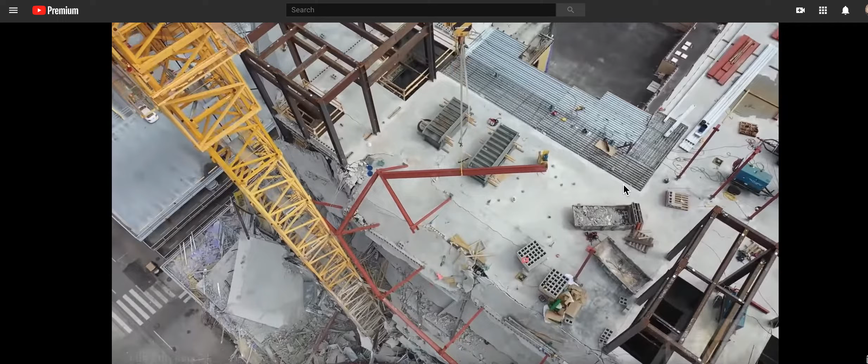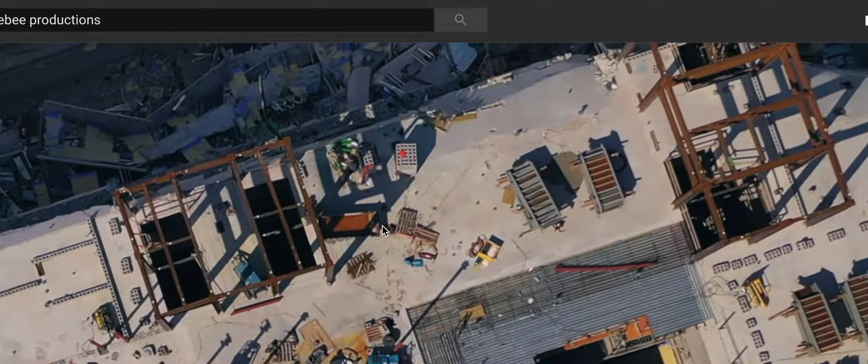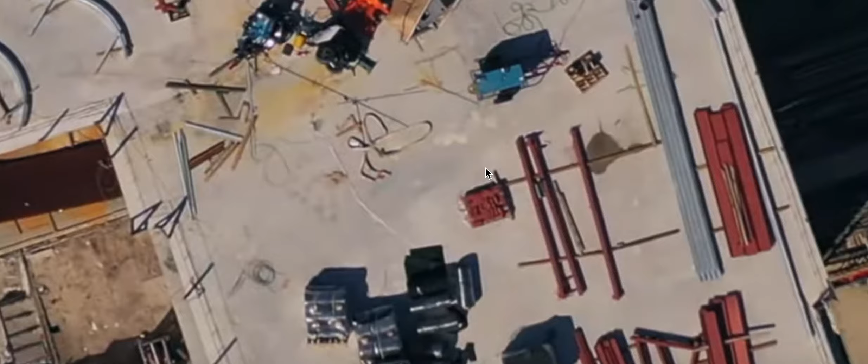As this falls down, this is what's going to cause all this strife across here. So right about there is our impact. I use triangulation here. I can come across the corner, come down and try to figure this out. Go to Bumblebees, and we come across the corner, high corner, the length of it. I'd have to figure out the length of this total crane length, try to figure that's another whatever X amount of feet. But there's the angle right here.

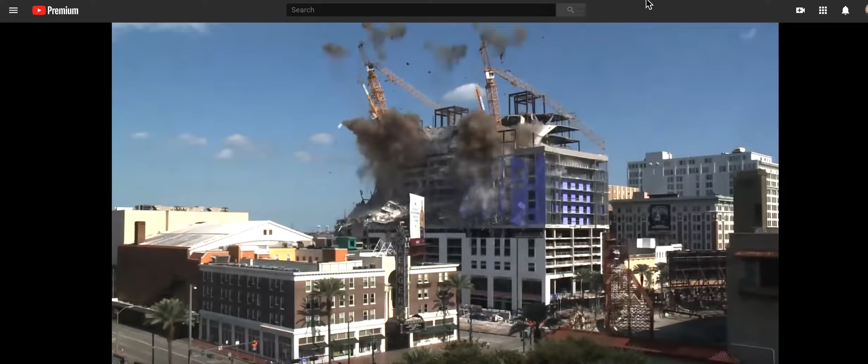Let's see if we can do this. We do have a debris field. I was trying to see if it impacted and broke the concrete decking here. I cannot find that took place. I don't see it - this decking, a diaphragm.

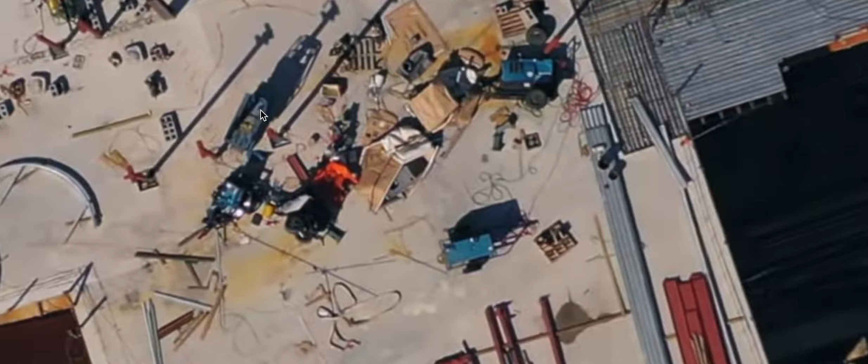Now it's almost a crime not to bring a crane up here and take this equipment off. It's still some great equipment. The equipment didn't do any harm. Why are they trashing this equipment? But this is the oddest thing here, right here. Got these multi pallets.

Let's watch this drag. Now watch it pull the bucket off. Nope, I don't see that. Right now it looks about parallel. And it hinged over at that point from here. Swing it, tearing it off, swing it over again like a baseball bat again. And there's a second swing.

This video shows the big concrete bucket. So this bucket came down now. This is going to pollute the whole idea of debris and everything else. This is where that path was. There are 1, 2, 3, 4 - well, that's 3 pallets, 4 and 5. So it's got concrete on it. Oh, it's got a piece of wood on it.

So we're trying to figure a path. There's a piece of wood. As you can see, that wood is still in place. That piece of wood right there, still in place.

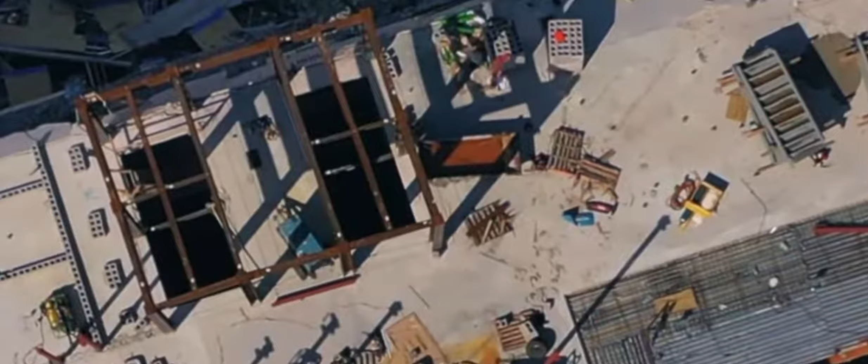It was able to - this path took out these columns. We're going to count the seated columns in a minute or not. And these columns took down - see the 1, 2, 3 columns, and here's a shadow of a column. Those columns did the deceleration of this. Let's confirm the location again.

These 2 columns did the deceleration of that crane because these columns loaded on top of - I don't know if it's a beam here or not. Look at the impact that thing was able to take. So these 2 did the deceleration. These 2 guys, was it 2 of them or 1? Was it these 2? I think it's these 2, right? Shadows on this one - these 2 took the forces.

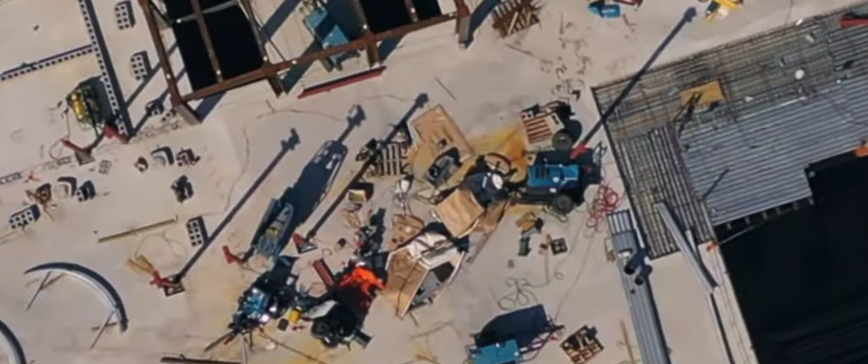Yeah, I guess it's red. There's a shadow, red, and there's a shadow, red. And then there's a gap. 1, 2, 3, 4, 5, 6. Those 2 did the deceleration of this. That's why we don't see the crazy impact. And there's the path it took.

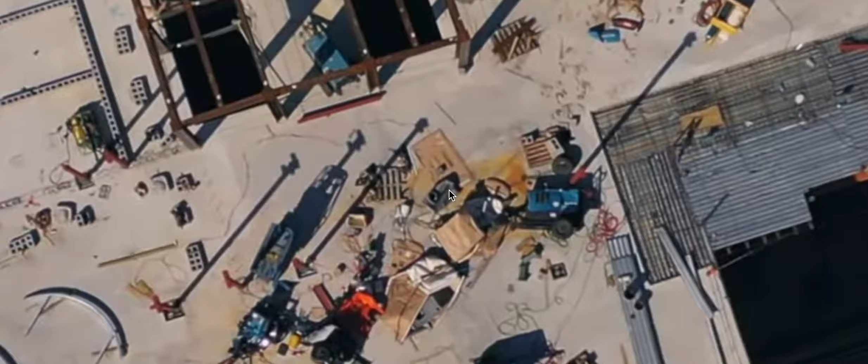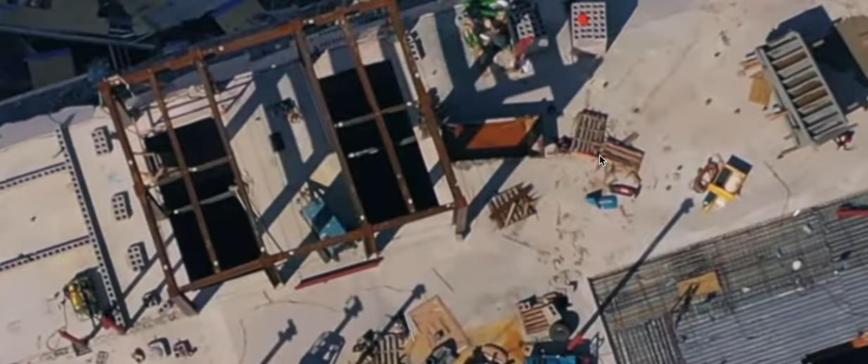I guess those red beams went off the building and became projectiles. It hit the back of that bucket. When it came off, it grabbed the front of the bucket, because there are the 2 pallets remaining, or maybe 3, not too sure. And that might be the path right there, the score mark. And then off in that direction it went.

I'm just sharing data with you. This is stuff - how I look at all this stuff and learn, and this is how I'm able to look at this debris field and start reverse engineering things by looking at things like this.

So that's the path. That explains why the deck was able to take that major impact initially, because this took the initial impact of the downward swing of the jib.

1 and 2, maybe they got entangled, or maybe they flung off like a broken nail, like you're driving a nail in there and it popped off and flew each direction. Who knows? You'd know if you find it down there or in another building somewhere.

It took that pallet out. That pallet went bye-bye. Yeah, that pallet and the cinder blocks also went bye-bye.

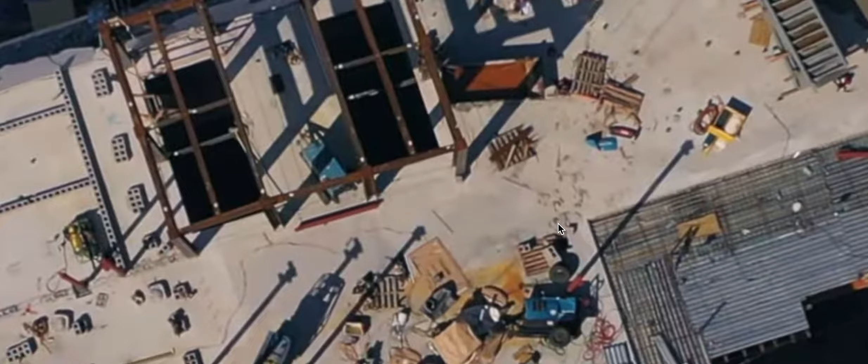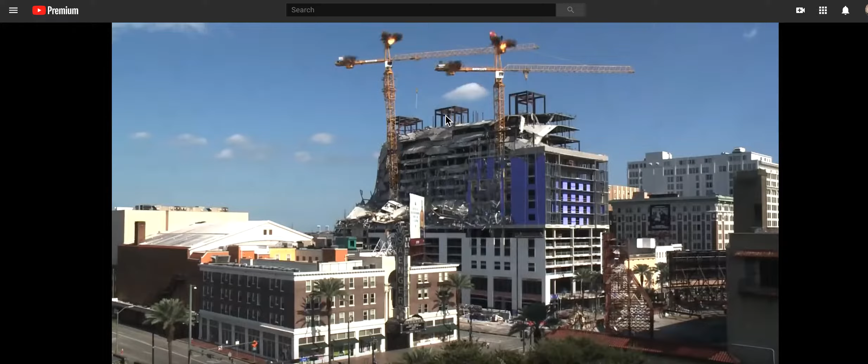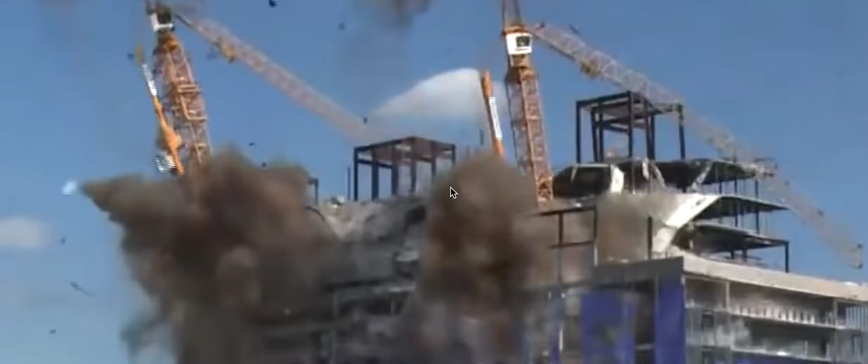So we don't even see it there, but right there is where it's probably hitting those red columns in the background. It would be these two, right there. I believe that's the impact of the 1 and 2.

That caused the deceleration of this guy. Now it's hung up or something, because we get this kink here at this point. Maybe it's still hung up on that, tearing those off. And maybe that's it there. I don't know.

I see debris falling. There's that projectile, swinging back around.

And this was supposed to be with the least impact, so we missed that thing go down. Maybe it slapped it so hard, maybe it slapped it off the backside of it. This is the concrete, this ton of concrete here, debris.

Well, the pallets are there, so 1, 2, 3, 4, 2 pallets that made it. So it didn't just, it did. I don't know how that. I don't know where that went. Maybe it went. No, it didn't go down there.

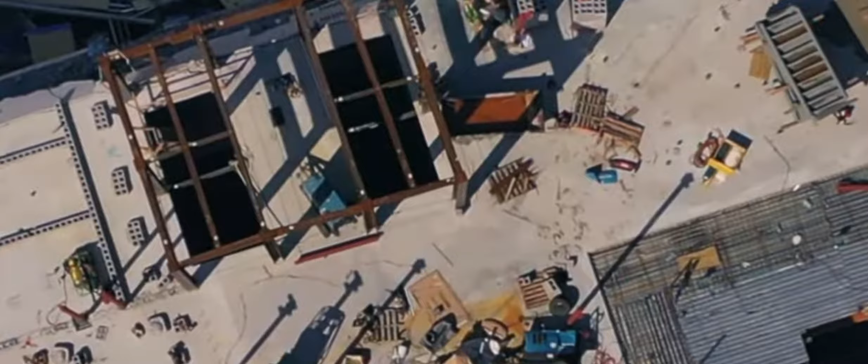Well, let's look at the configuration of this. These are not touched. There's a red rope there of some type, maybe the lanyard. The rope appears to be right there too. So that appears to be the path that we missed it being dragged off somehow, or projected.

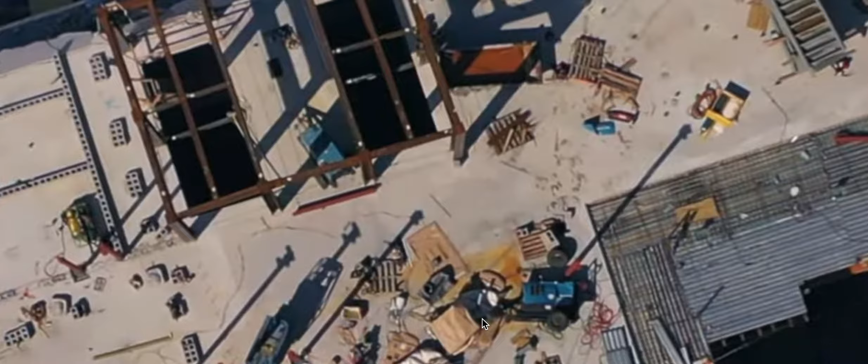Maybe when this hit, it popped it, and maybe that steel hit the back of it, giving enough force, like a baseball bat again, to drive it off.

I don't think it went across here. There's something in the path there. All this is in the path here. I think this is the path, and we just don't see it.

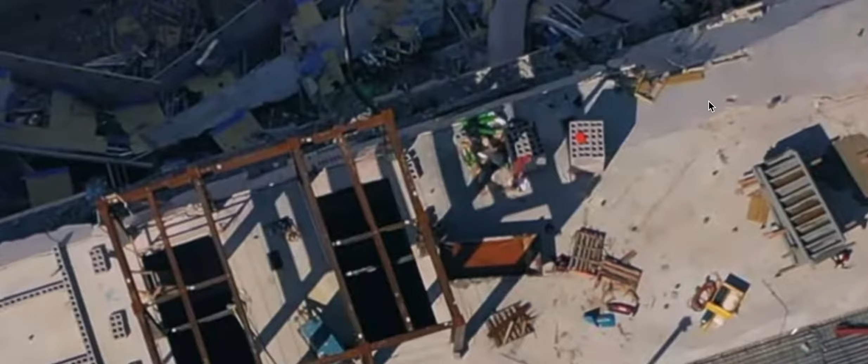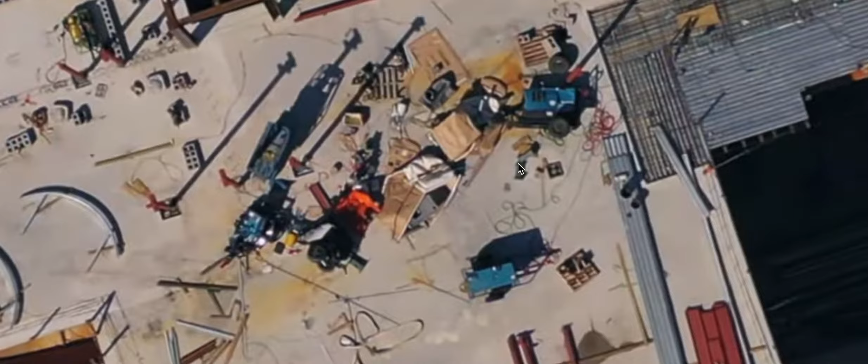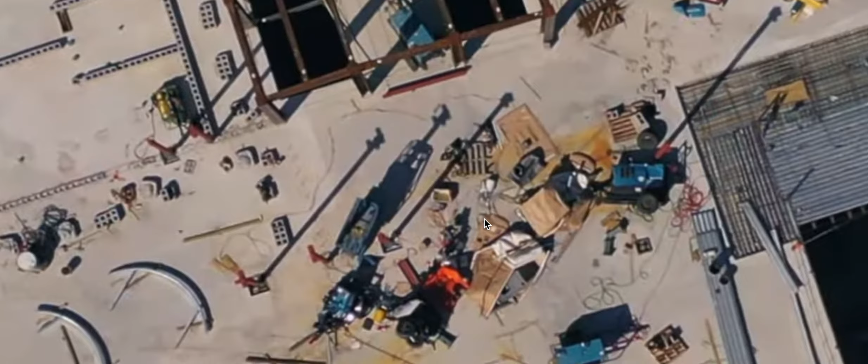I'd like to see that in another video, but now this explains the impact. It would be very interesting engineering-wise to look at the columns below this and the steel below it, and try to calculate what the forces were, or roughly call it dead weight impact from a certain distance, and see what happened there.

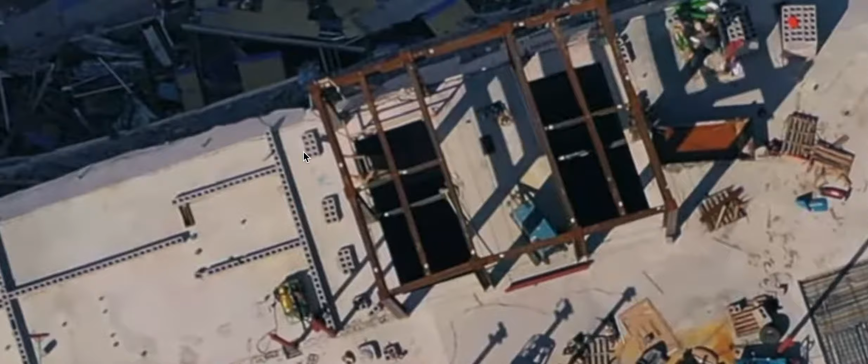The wall system, we talked about that. How much did they make it out there? I think right about here is where they were going to start building the storage area. I don't know, there's a stockpile of materials here.

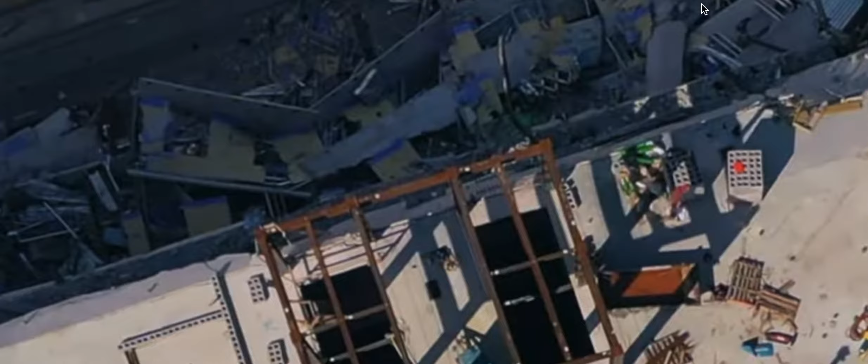Let's jump into what I was going to present to you today also. So I wanted to give you that for a little teaser, then we'll jump right into OSHA.

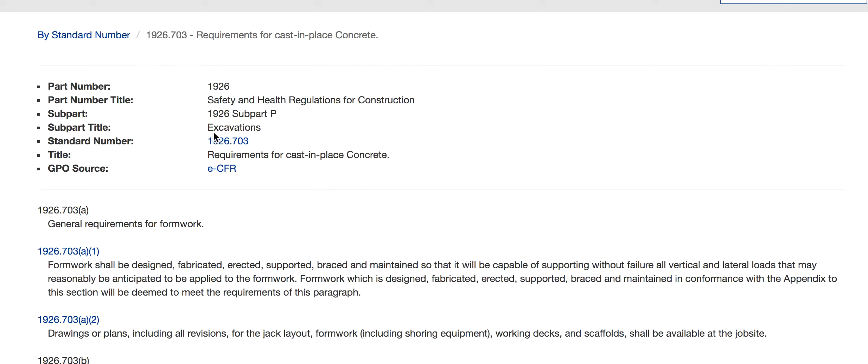I believe 703, so this is going to be addressing formwork, and what I'm going to show here is, well, let's let it read: general requirements for formwork. General requirements. Formwork shall be designed, fabricated, erected, supported, braced, and maintained so that

it will be capable of supporting without failure all vertical and lateral loads that may reasonably be anticipated to be applied to the formwork. You understand what it just said? Reasonably be anticipated - meaning it's subjective.

You believe that this is the forces, and so you're going to say, well, this is the formwork I'm using. Formwork which is designed, fabricated, erected, supported, braced, and maintained in conformance with the appendix to this section will be deemed to meet the requirements of this paragraph. So if you think it's reasonable and you're qualified, you can back up your reasoning, and it sounds reasonable.

Why that sounds reasonable - then you're good to go, because they're using reasonable, not any other strong format. It will be a bit of a strong format down here, but it will still come down to reasonable. Drawings or plans, including all revisions, for the jack layout, formwork including shoring equipment, working deck, scaffolding, shall be available at the job site. Well, where else would they be available, right?

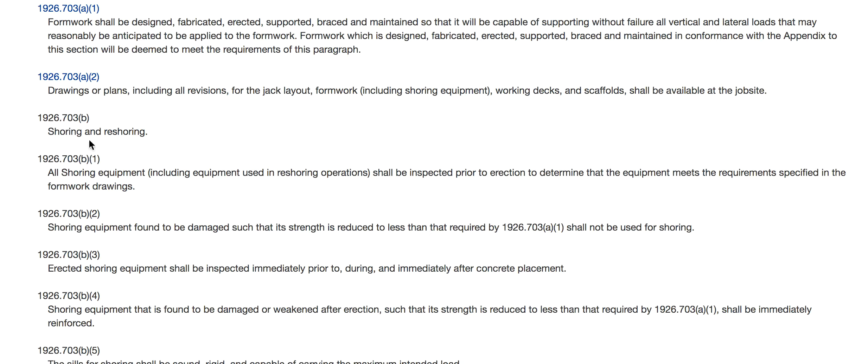Shoring and reshoring, meaning you've got to have it. Shoring and reshoring. This is what we talk about with this structure that we just saw exploding. Whatever, I've got FIU in my mind. It's Hard Rock Hotel. All shoring equipment, including equipment used in reshoring operations, shall be inspected prior to erection to determine that the equipment meets the requirements specified in the formwork drawings.

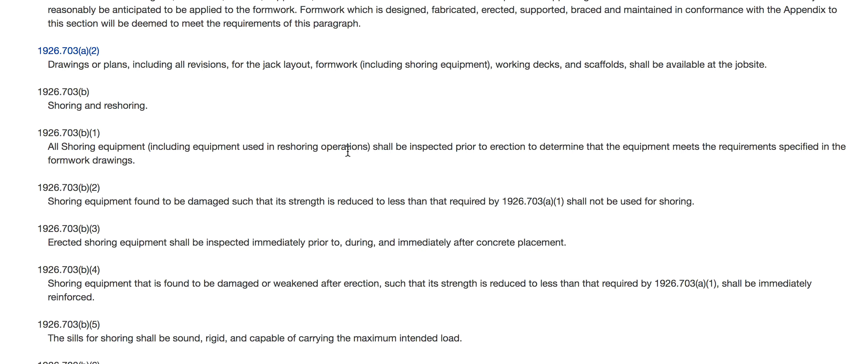So this is so vague. This means you can't say, I think it's okay. It says it shall. It shall. So you can't use your equipment as an excuse that I thought it was okay. It shall. It means it must. Shoring equipment found to be damaged, such that its strength is reduced to less than required, shall not be used for shoring. So you can see you can have damaged equipment. It just needs to meet the loads that you currently are going to apply to it.

Erected shoring equipment shall be inspected immediately prior to, during, and immediately after concrete placement. Look at the issue here. Erected shoring equipment, so that's all equipment, right? All the braces shall, meaning must, be inspected immediately prior to, before you start, and look at this part, during. This means you do get to send a worker down there, and this is what I stated, saying I wish they'd make it so no one can work on the floor below. But OSHA states you must send somebody down there to check the shoring, and immediately after concrete placing.

But the person you send must be qualified, and this is what I put on my tag in that last video, saying if they do it, it should be a qualified person. That's what I was trying to allude to. But now, as one of the law classes I've taken for continuing ed stated, law enforcement classes, I'll give you that much, the instructor used to always say it's nice to be right, but it's better to have a cite. So what I told you was kind of the nice to be right type thing, but now I'm giving you the cite. That instructor was very serious about, you can say it, but now back it up.

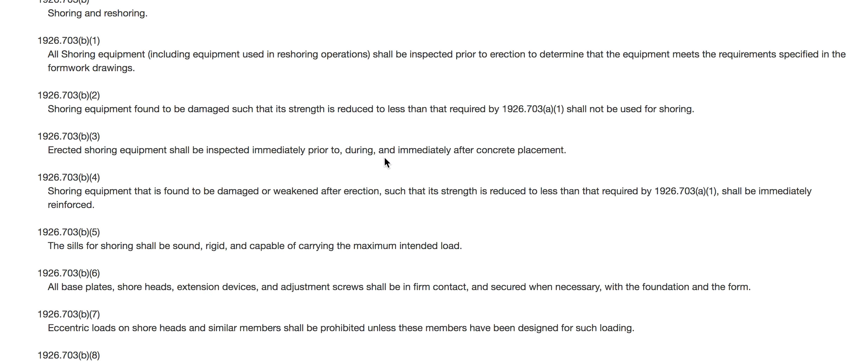So I would back it up under 1926.703(b)(3). Erected shoring equipment shall be inspected. So I'd back it up that I was allowed to send that man down there because he's qualified, say he was. I don't know. Because he's qualified. That's the qualification thing that's going to really matter in a moment. I tried to ask the cousin who wrote on the link there to ask the friend, was his friend qualified to do that? This would be the main issue here.

Shoring, under the next section, found to be damaged or weakened after erection, such that strength is reduced to less than required, shall be immediately reinforced. So they're stating it must be immediately reinforced. I think shall is wrong here. I think OSHA is putting people in danger. You'd rather walk away from that shoring than attempt to shore up something that's collapsing underneath you, actively moving. You'd rather call it a day, unless you know how to brace it, working your way up to it, not just jumping right to the middle of it, attempting to push it. You'd have to actually have training in how to reinforce that specific load, and that training would not be typical.

I would argue that you'd have to first figure out that this was the part that was collapsing. You've got to surround it, secure the area around so you can limit the collapse back to this new shear plane, as I like to call them, and then close that shear plane in. But imagine most people would just say, oh, it's buckling there or falling down there, I'm going to put a load right there. That's going to be pushing that load all around. It's not going to work. So I argue that this is actually an unsafe act by OSHA, stating you shall immediately reinforce.

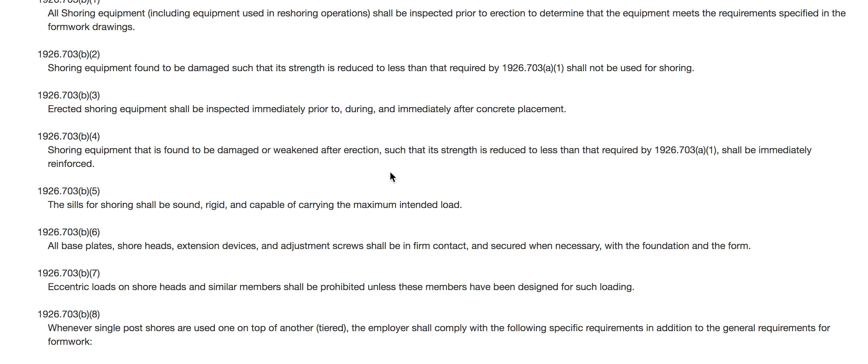This is ridiculous. Shoring equipment that is found to be damaged, and this part here is important, weakened after erection, such that the strength is reduced to less than required, shall. So after erection, it is weakened. How do you know? Now you say, well, he didn't say it was being poured.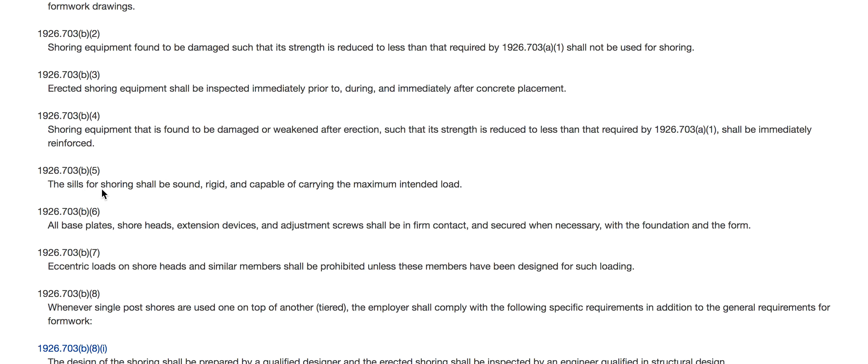Bear with me. The sills for shoring shall be sound, rigid, that's the base plates, and capable of carrying the maximum intended load. All right. All base plates, shore heads, blah, blah. Eccentric loads on shore heads.

This part here is interesting, because all codes are subject to interpretation, meaning you could play with the interpretation of what they meant by it. They don't give you a more direct explanation of exactly what they're talking about. It's subject to interpretation. Whenever single post shores are used one on top of another, tiered, the employer shall comply with the following specific requirements in addition to the general requirements for the formwork.

What's the definition of tiered? I would almost argue that if you put a 4x4 on top of a 4x4, you just created a tiered section. The design of the shoring shall be prepared by a qualified designer, and the erected shoring shall be inspected by an engineer qualified in structural design. This is the next subsection.

So this part right here, where they said you inspect it, that worker now gets eliminated as far as I'm concerned, because the design of the shoring must be prepared by a qualified designer, and the erected shoring, meaning the shoring that's already put in place, must, there's a shall there, be inspected by an engineer qualified in structural design. So your regular civil engineer guys don't really qualify, because they want somebody qualified in structural design.

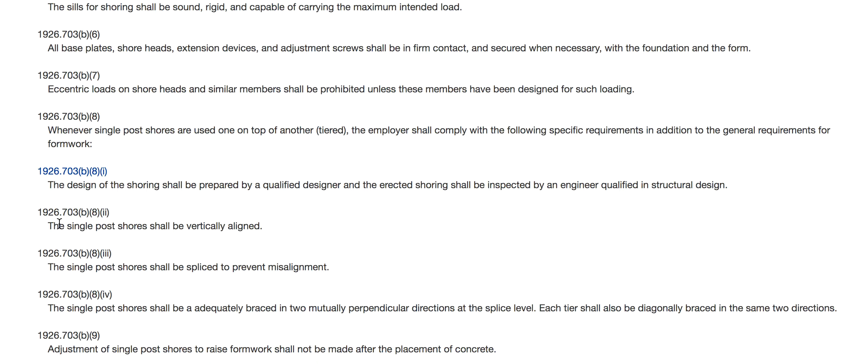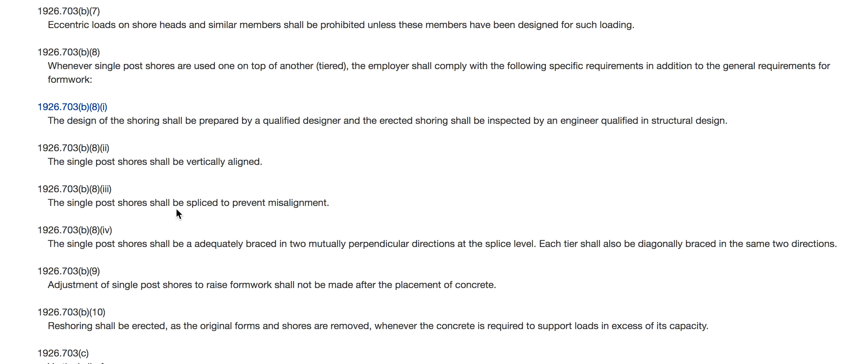The single post shores shall be vertically aligned. Vertically aligned. So what is acceptable as vertical? What's acceptable as plumb? The single post shores shall be spliced to prevent misalignment. Isn't that interesting? The single post shores shall be adequately braced in two mutually perpendicular directions at the splice level.

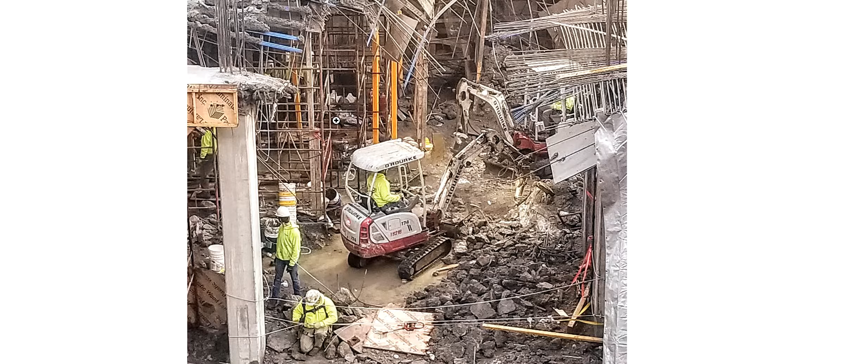So perpendicular. So when we see our man, is it right here? He sent me the images. These are scaffolding right here. This one's not perpendicularly braced, is it? Unless somehow they braced it back to here, and you consider the cross bracing on this scaffolding perpendicular, and then you'd have to go this way. But these are two. This is a splice system. Look, 1 and 2. I don't know if it goes down to the ground. It appears not to. That would be a lot of cutting.

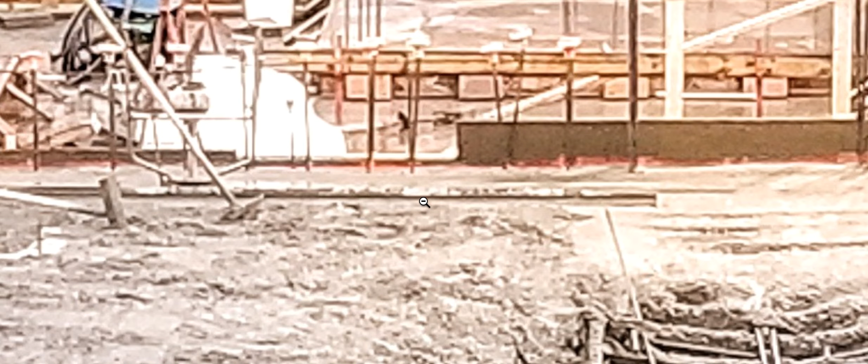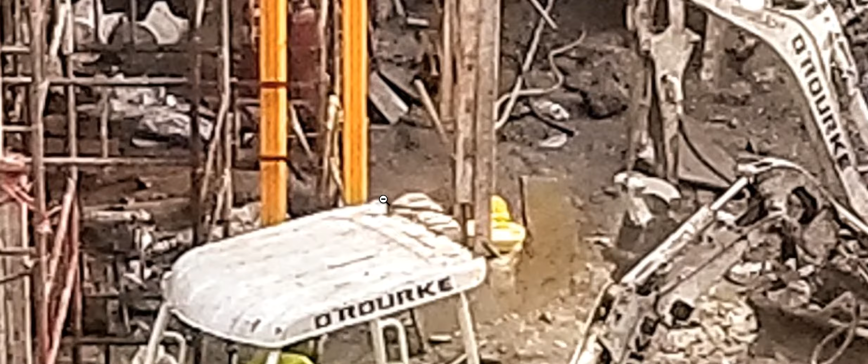Firemen moved a lot of stuff, as we saw, but in this other image, they used cross bracing. Remember video number 3 on this? I think it is. You have to go find it. I talk about how they used cross bracing and not perpendicular bracing. I don't see where OSHA allows for cross bracing. I see where they say perpendicular.

Oh, great. I lost it, right there.

Okay, here we go. Each tier shall be diagonally braced in the same 2 directions. Now we say diagonally. So first they say 2 mutually perpendicular directions at the splice level, and then we go here. Each tier shall be diagonally braced in the same 2 directions. So they want times 2. I mean, this is what I'm looking at. They want diagonal and cross bracing, parallel, perpendicular directions of the splice. I don't see that there. So just pointing that out.

Adjustments of single shores to raise formwork shall be made after the placement of concrete. Now, did you just see what the concrete weighs so much? This is the most stupidest thing I've seen so far. Adjustment of single shores. So there's single post shores. To raise formwork shall be made after the placement of concrete. Oh, I'm sorry. Shall not be made after the placement of concrete. So you can't raise it anyway. It's a single post. It's only one size. How are you going to raise a single post shore? Unless they're talking about the splice kind where you can crank it up like a threaded screw kind.

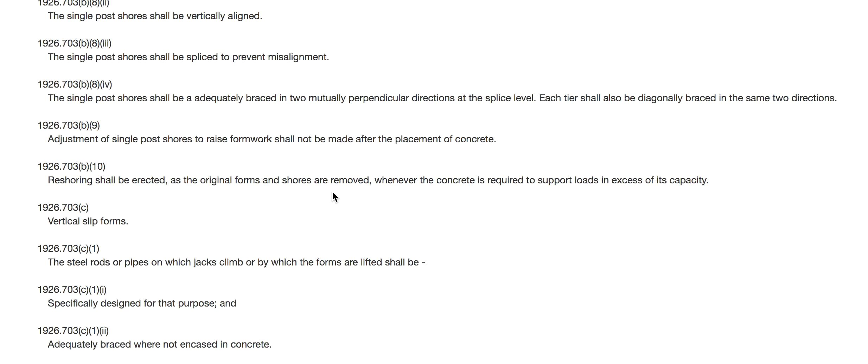So shall again. As the original forms and shores are removed. So as you remove one, you're putting back the reshores. Whenever the concrete is required to support loads in excess of its capacity. All right, so this means that the concrete hasn't matured yet. This is what this means. Not that you're going to keep them in there forever. And we'll get to that. Vertical slip forms. Let me see if I can find that real quickly.

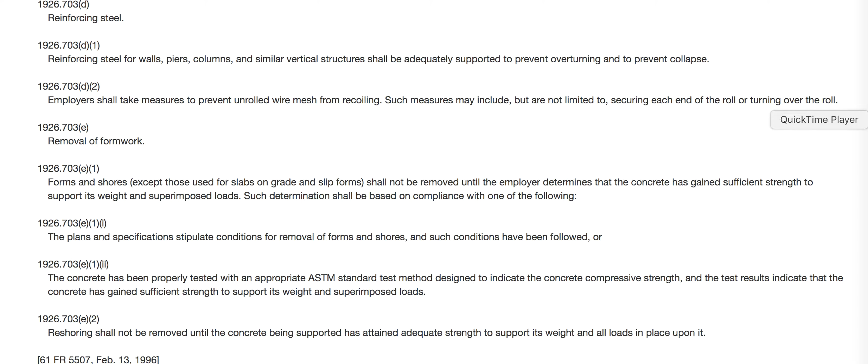I'm going to pause it and get it to you. Hold on. I know I'm looking for it to show you when you can remove the forms. Oh, it's right here.

All right, removal of formwork. Forms and shores, except those used for slabs on grade and slip forms. So this is not slab on grade. These are elevated concrete pads. And they're not slip forms as in climbing up a wall. Shall not be removed until the employer determines that the concrete has gained sufficient strength. So the employer is the one that determines it, and he bases that on whether it has gained sufficient strength to support its weight. So it has to support its own weight, meaning the deflection would be limited to what is allowed, and superimposed loads, which means any material loads, people walking, working loads, things like that.

Such determination shall be based on compliance with one of the following. What did I just say again? One of the following. Not all of them, just one. You choose. The plans and specifications stipulate conditions for removal of forms and shores, and such conditions have been followed. So that would be one if it's in the plans. Or, see the or, this version. The concrete has been properly tested with an appropriate ASTM standard test, that you have a sample and you test it and it states that it's good to go. To indicate the concrete compressive strength, and the test results indicate that the concrete has gained sufficient strength to support its weight and superimposed loads.

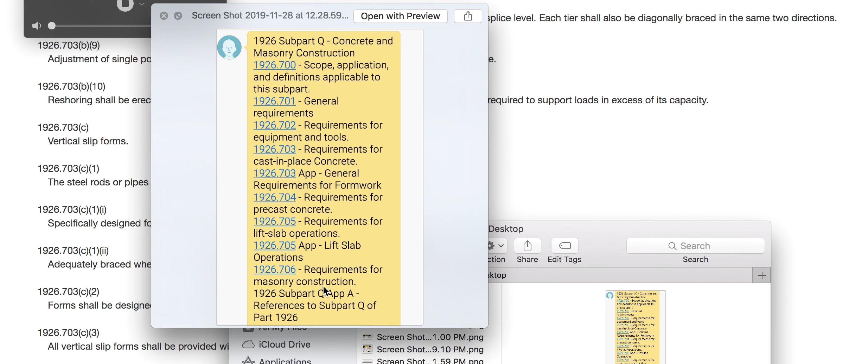Okay. Lastly, I'm sharing my source with you guys. This is my source. It's one of my OSHA friends. I wanted to make sure that what I was doing was right, and he said, "Go to these instead." I went to one of these on the site, and he wanted me to add all of this together, and so I'm giving it to you. This is probably what OSHA will use when they're referencing, is what he was basically explaining to me. They'll reference all of this for any of the violations, including equipment operation, face shields, things like that. And of course, we don't have lift slabs, but I wanted to give this to you.